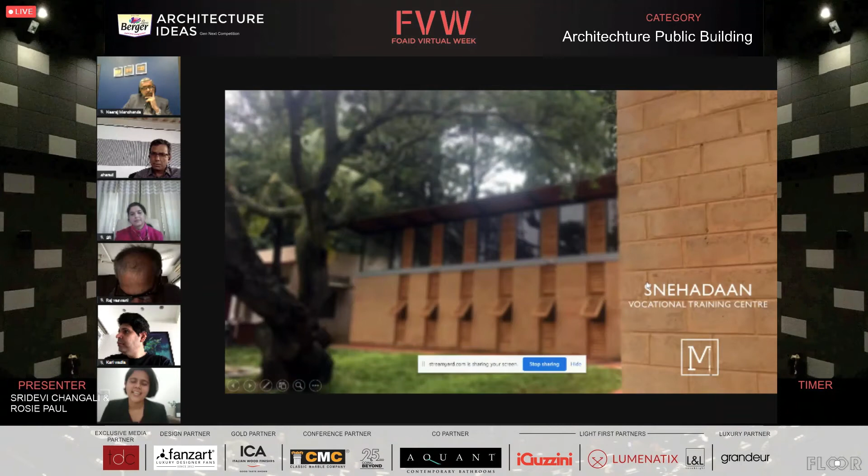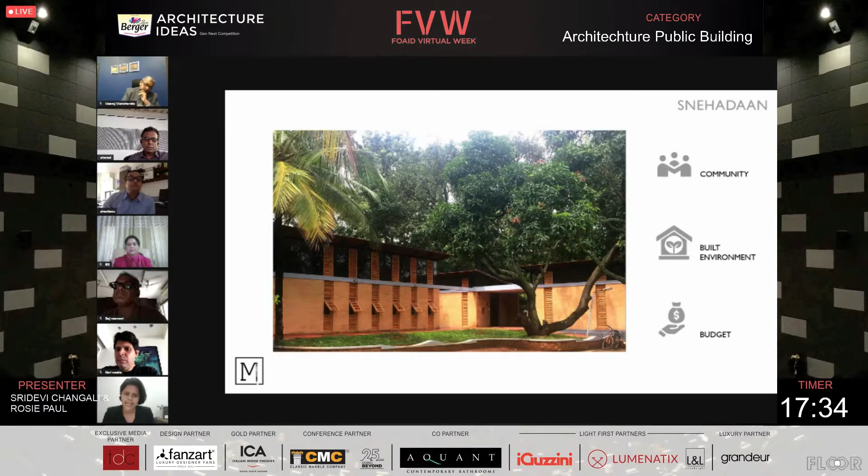Before I get into the details of the project, I want to tell a little bit about what makes this project special. We've focused on three main verticals: the community that the project is serving, the built environment, where we've tried to make it sit as lightly on the planet as possible, and the budget. We had a very tight budget of 20 lakhs for a built-up area of 1,800 square feet.

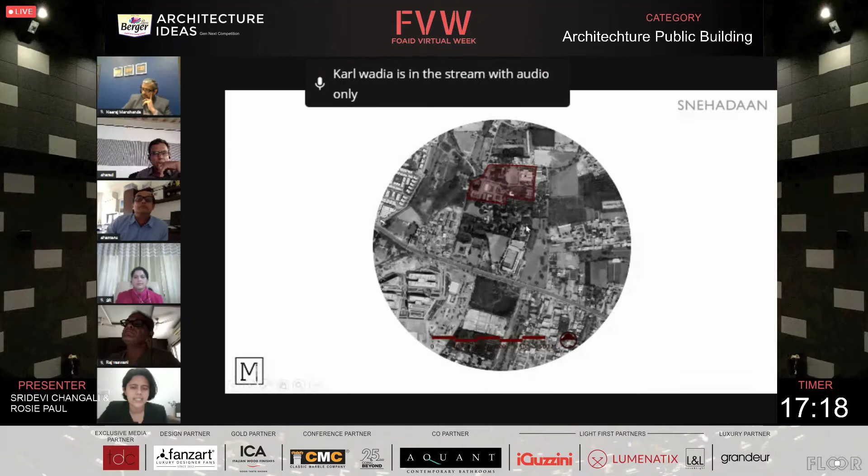This slide shows the urban fabric where the site is located. The highlighted portion is the entire Snehadaan campus, about 10 acres. There are different components to this campus: a 50-bed hospice, the location where the staff and priests who take care of the people stay, and a small school serving some destitute children in the area who are also HIV positive. None of these buildings have been designed by Masons Inc.

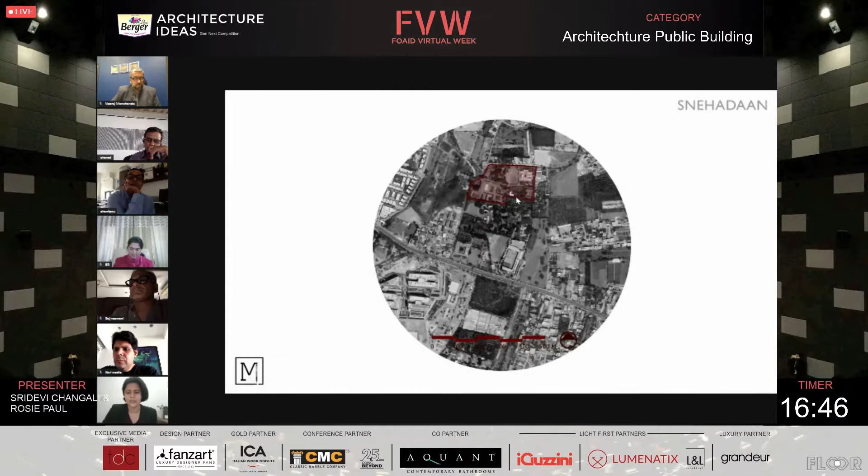What is our intervention today is this little L shape that you see tucked away within the trees. That will be the focus of the presentation today. The Vocational Training Center gives them the vocation of how to make candles.

The different requirements were divided into three main blocks. Blocks A and B are being highlighted now, and the bigger block is the actual workshop for the candle making unit. All these are centered around one beautiful tree that was already on the site, and we were able to avoid cutting any trees on site, providing a beautiful canopy on top of the project.

The other thing that was of benefit to us was that the longer span of the site was facing north. So we spanned the workshop unit east-west, so we could optimize that beautiful natural light into the main candle making workshop. Most of our glass and facade was focused onto that north facade.

The different uses are now being highlighted here: a hall, display area, and the candle making workshop itself with some toilets tucked away. In terms of access, the entire unit had to be wheelchair accessible, done through a ramp and a continuous external veranda connecting the other spaces. We have a little courtyard in the middle as well, which acts as a breakout space between the different uses.

The sloping roof format was selected for budget reasons and also to bring in maximum sunlight. The other thing we've achieved is a modular kind of framework, which also helped a lot in controlling the budget. So you have the smaller units, which are a single module, and for the larger unit, all we did was expand that two times to make a larger space for the candle making workshop.

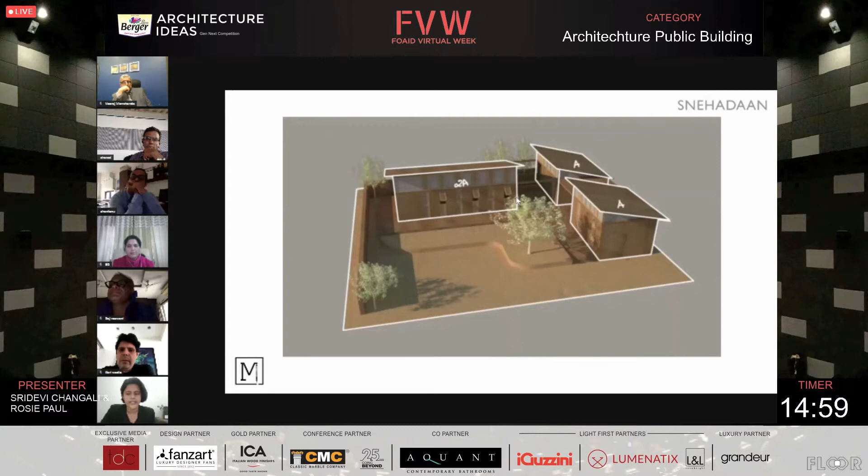Now that you've been oriented in a 3-dimensional format, I'll take you through the plan and circulation spaces once more. This is the ramp. It first leads you to an external, semi-open veranda. First, visitors are taken to the multipurpose hall where they're spoken to and made aware about people living with HIV and the disease itself.

After this, visitors are taken to the candle making unit where they understand how the candles are made, and later in the display space, they can buy the products. There's a little store here which is directly connected to the workshop itself.

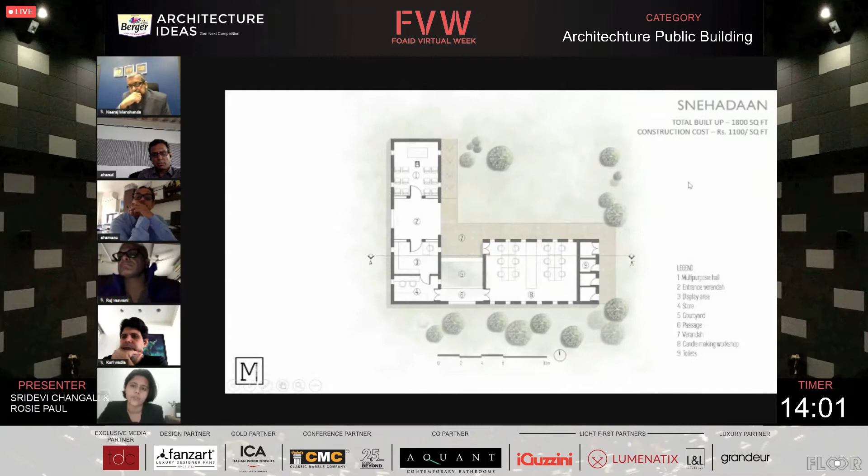As you can see, it's a very simple plan, with the toilets tucked away to the side. There's no fuss—it's just a very simple, straightforward plan that helps with clarity in terms of design and also controlling the budget again. As I said earlier, the total built-up area is 1,800 square feet, and we were able to achieve a construction cost of 1,100 rupees per square foot.

What we've also done, if you've noticed in the pictures, is work with the beautiful green pocket that was there on that 10-acre site. We've created these little openings that frame the outside and really help connect with nature, even when you're inside the buildings.

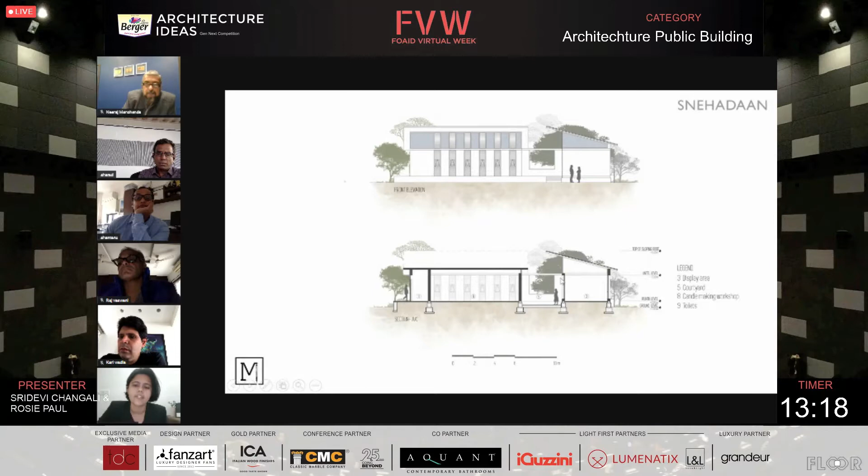Now, I just want to talk a little bit about the community. As we all know, people living with HIV are most of the time ostracized by society and not well integrated. So what the Sneha Trust is doing is exactly trying to break this. So when we got this project, we thought, as architects, how do we answer this question, or fight this image that people have about people living with HIV?

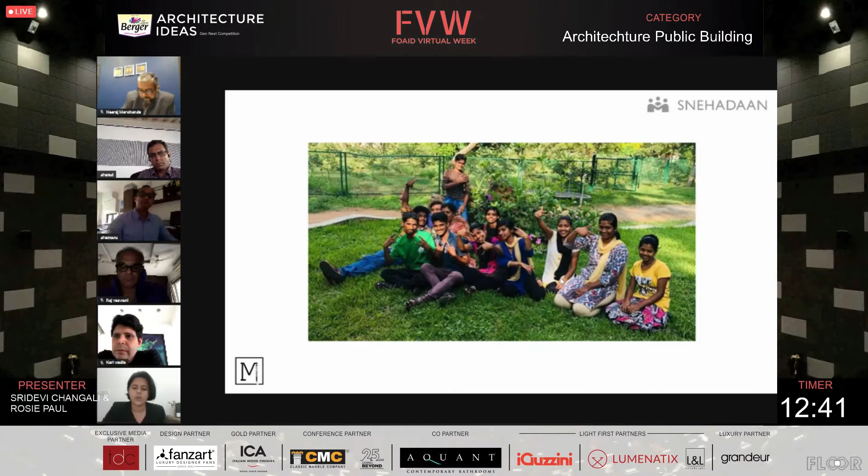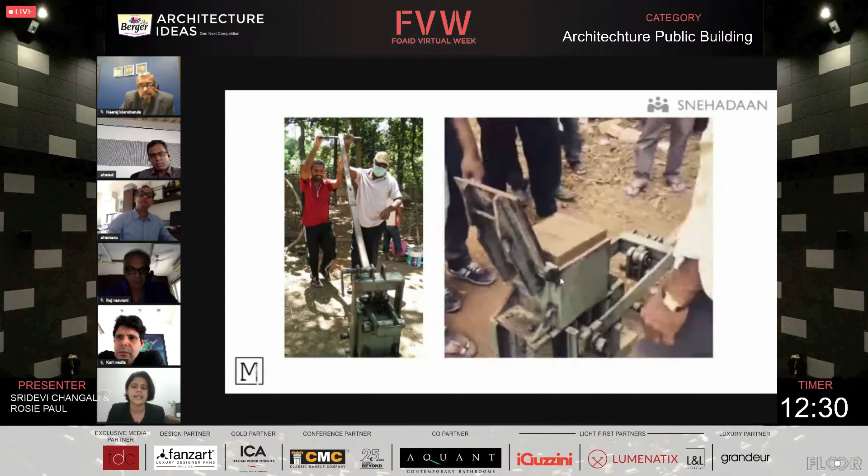Through our building, we integrated the community into the design, not only the design process, but also the actual construction process. A lot of the priests who cater to the people here, as well as the people themselves, came together and built some of the blocks. In terms of materiality, we used compressed stabilized earth blocks, and they all came together on multiple days, and even our team was on site building the blocks together.

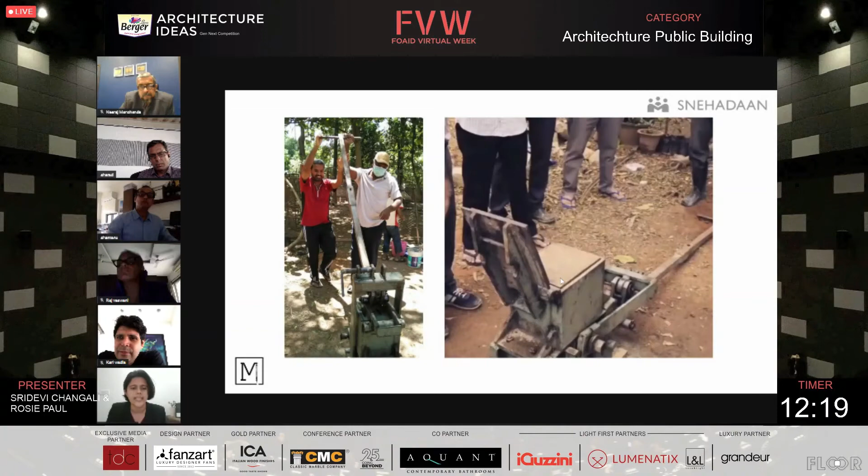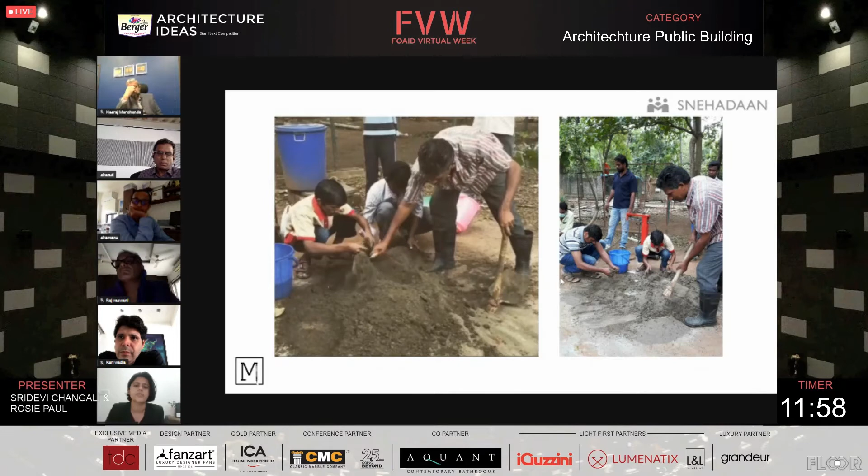What essentially this does is it creates a better sense of belonging to the building, and they have an added vocation to their existing skill set, and overall it just creates this beautiful ecosystem that helps community building and interaction between the different stakeholders of this particular project.

Moving on, just to talk a little bit about the materiality. If you've noticed, we've kept the material palette very simple. The main material here is mud blocks, which are compressed and built on site. The mud is also sourced from site itself. Essentially what this does is, one, it reduces cost a lot, because we're using the majority volume of material sourced and processed on site itself.

The second benefit is the eco-friendly nature of the material, where it gives you enough thermal mass to give a very pleasant indoor temperature throughout the year.

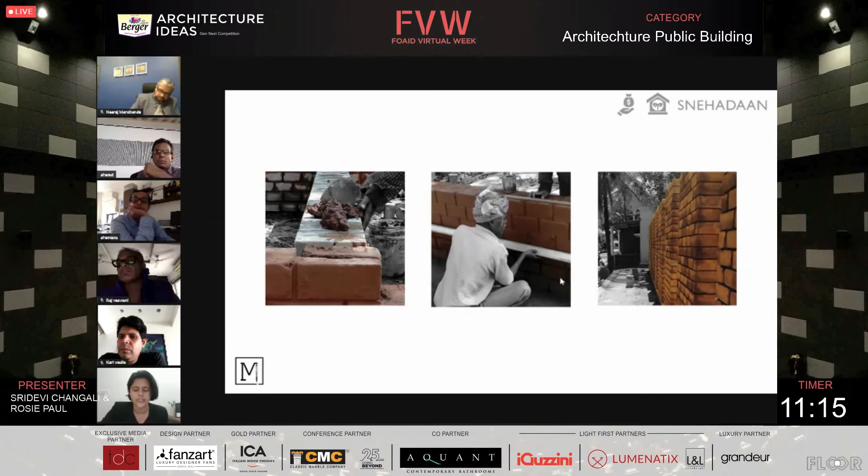Here we have, again as I was talking about, the bottom half being quite massy and blocked off. What we've done is we've kept the windows very narrow, about 2 feet wide, and the strips along the facade create this beautiful kind of pattern. We've continued the louvers on top, and there are a lot of openings that connect the outside to the inside, but at a higher level. So this gives you the privacy that the client needed.

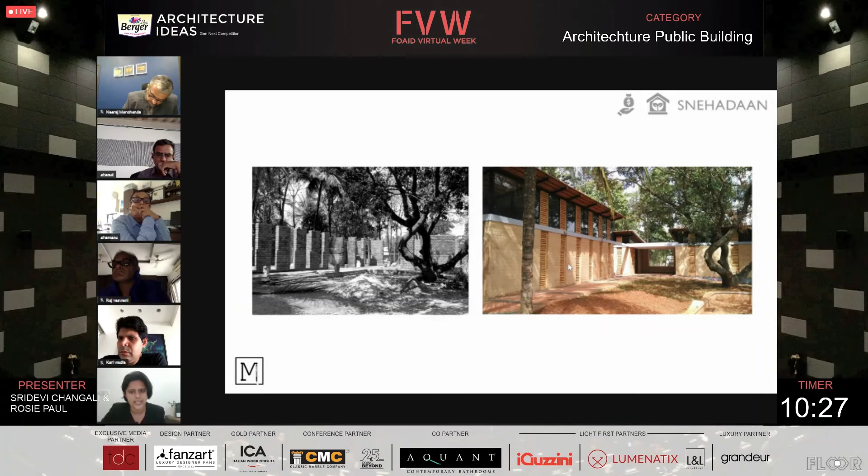The other thing the client also required was a lot of wall area at the bottom, so that they can stack their shelves and furniture against these walls. So that's another reason, and this was the design response to that particular requirement put forth by the client.

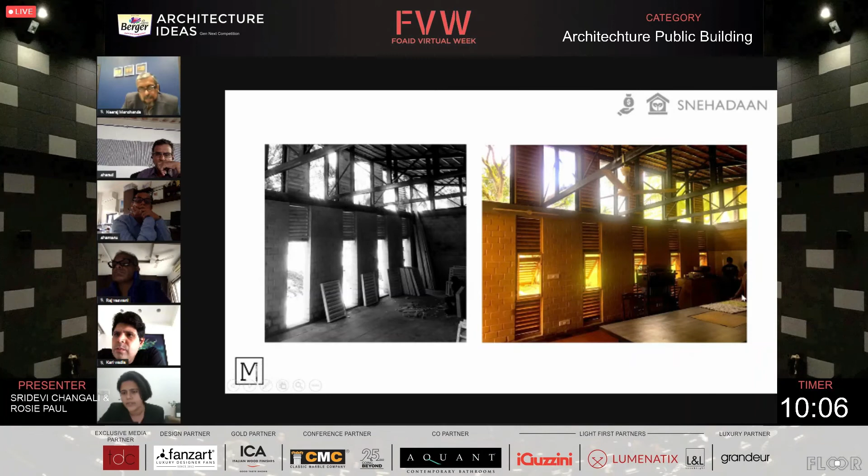Here are some internal shots. You can see the equipment is just being set up at this point. You have these louvers at the bottom continuing to the top, and a lot of glass happening at the top level itself. What this does is it brings the light deeper into the space. And here are some pictures of the construction of those windows itself.

Talking about the materiality of the windows, we used wood, which is again an upcycled material. The material palette is very simple - very few materials, but in my opinion, still creating that interest in the simplicity that there is.

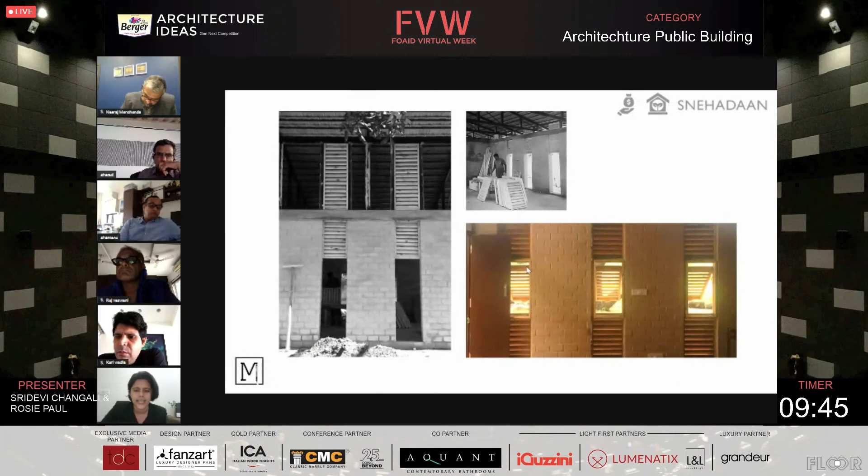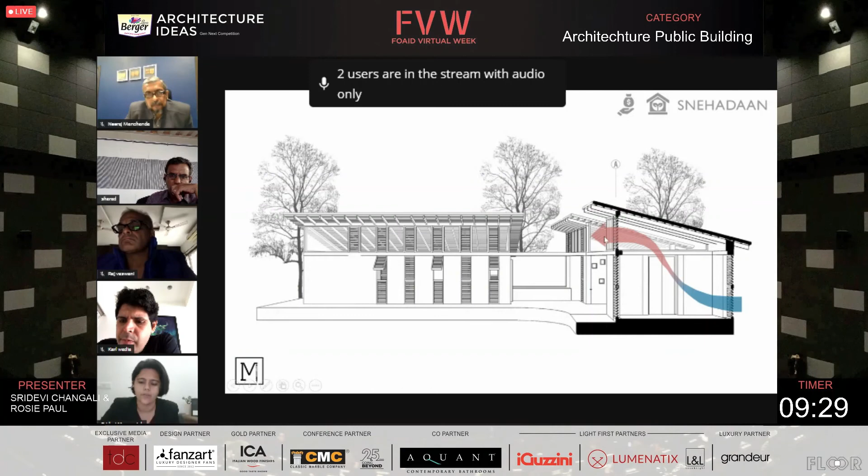Moving on to the climate responsiveness, we have a continuous draft going through the building, good cross ventilation, and these openings on top let the hot air escape very well. Plus, the openings on the higher level really help you connect with the green canopy on top.

Just a little bit more about the skin of the building. Again, very simple. The roof is Mangalore tiles mounted on steel girders, MS girders. And we have the pine wood or crate wood louvers that we've created here, which continues at the bottom as well.

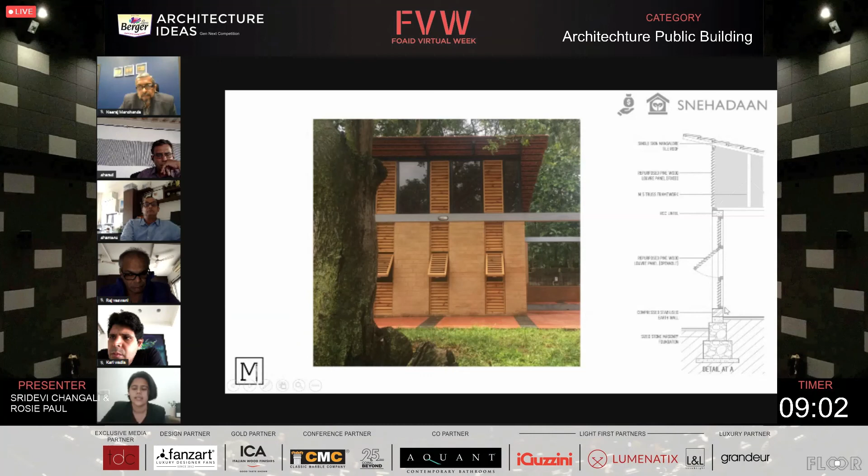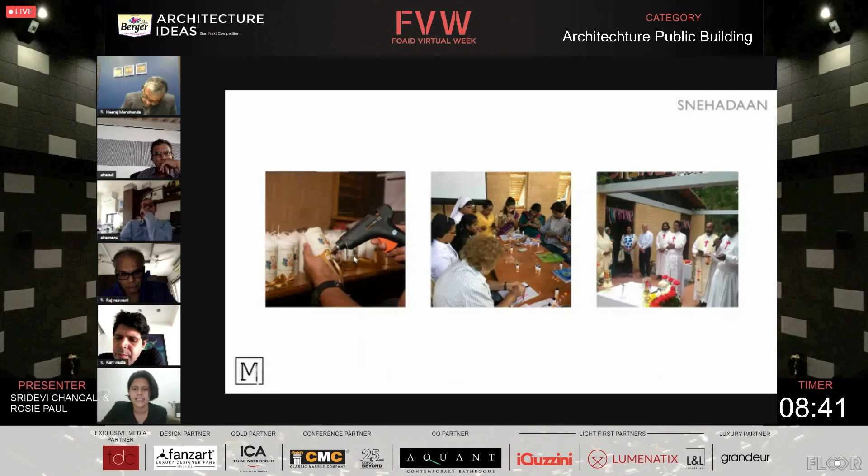Here are some images of the people using the space. Here you can see some of the people who were the block makers have now adorned their priestly attire and have switched their vocations quite beautifully. And here you can see the people sitting in the space and making the candles and doing the little added intricacies onto those candles. Some more images of the materials here.

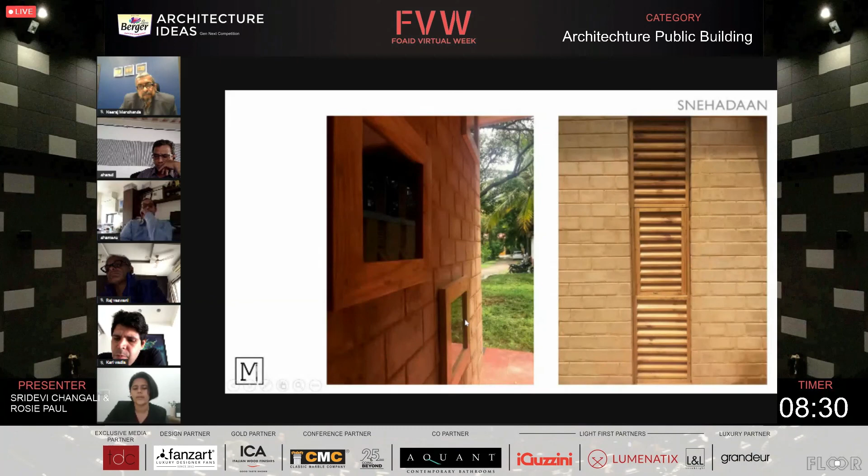So these are some of the display windows that are used in the storefront, where the products are placed, and visitors who come can buy the products from the building itself.

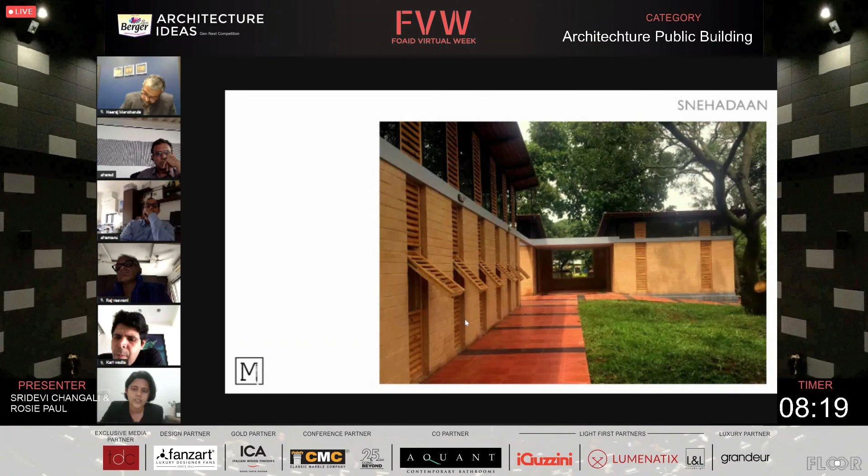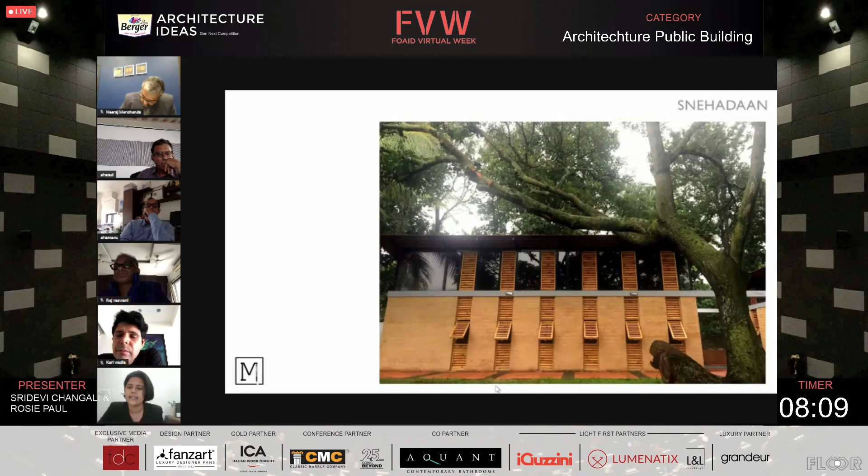So one thing I just want to end this presentation by saying is that when we are good to nature, nature is really good to us. We have respected the tree canopy on site, and what it's left us with is this beautiful ambience, a very welcoming building, and generally it just rewards you back in so many different ways.